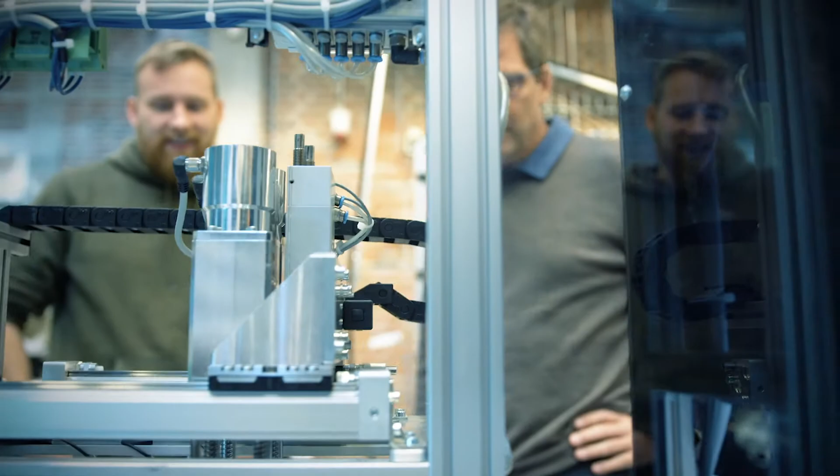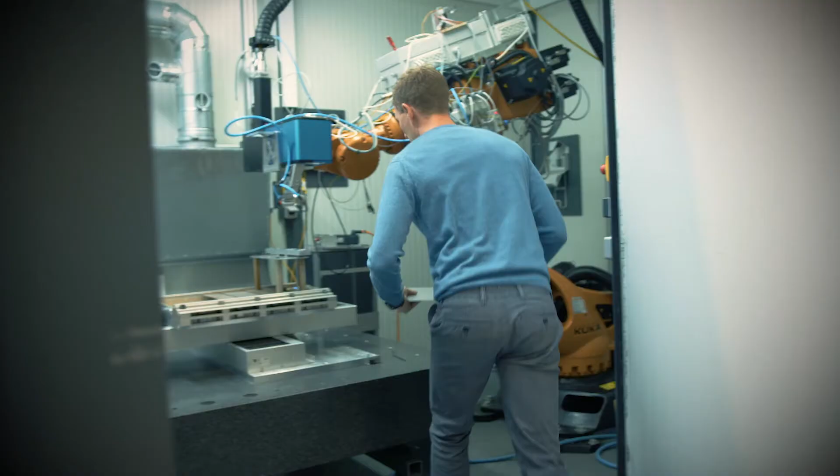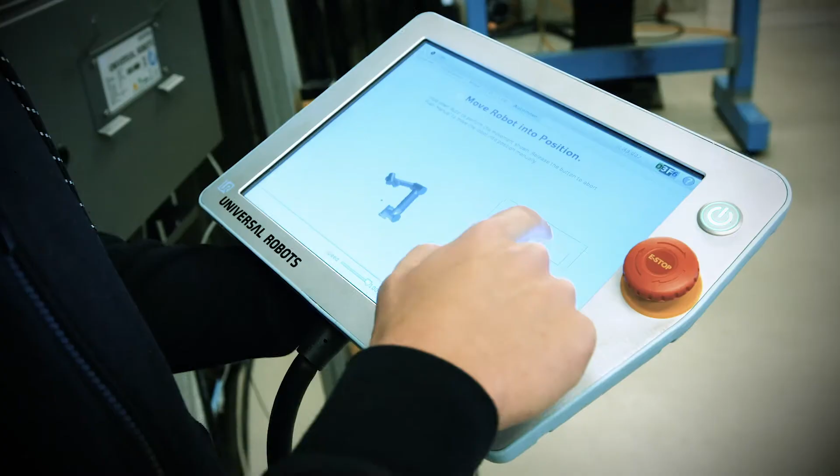The lab is a lab where we investigate robots. It's a multidisciplinary lab where we are focused on advanced robotics with a special emphasis on manufacturing robots. We created the lab because we saw there was a big need for robots in industry. The industry is challenged by small batch sizes, by constantly introducing new products and so on, so there was a need for new robotic systems for manufacturing. We also saw a need for multidisciplinary research, and we found that having a physical lab, a place where researchers from various departments could meet and do research, was very useful. We have 4 focus areas.

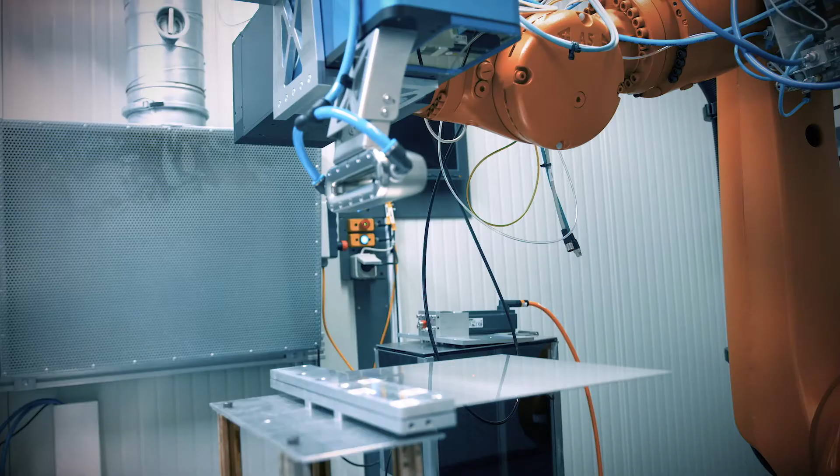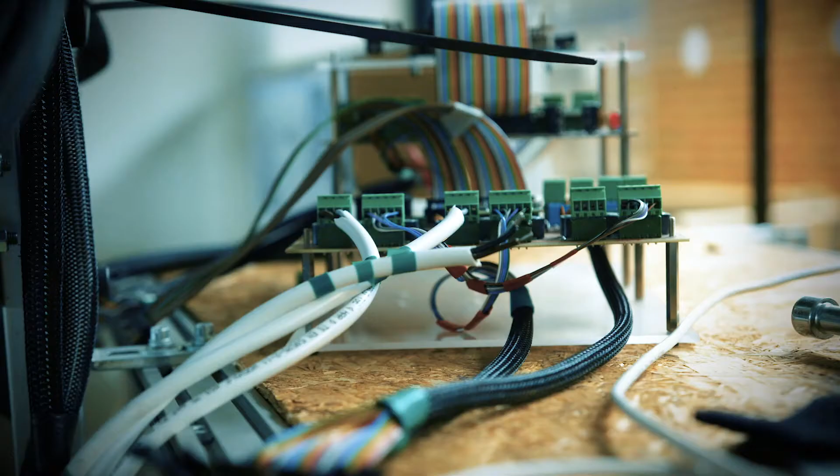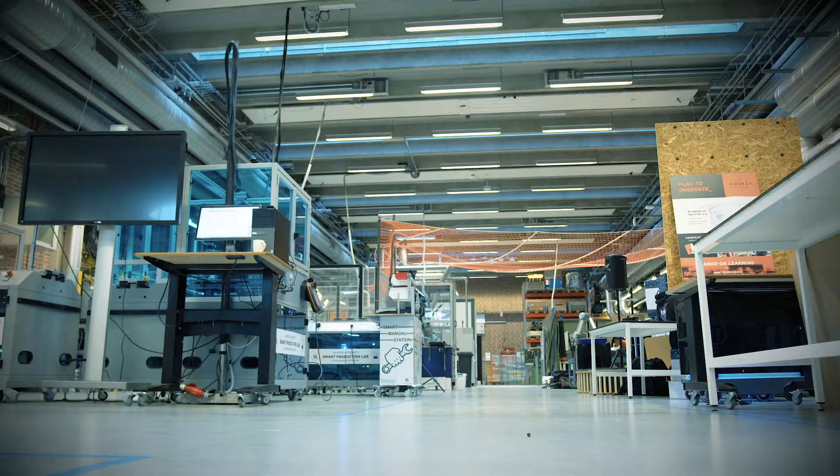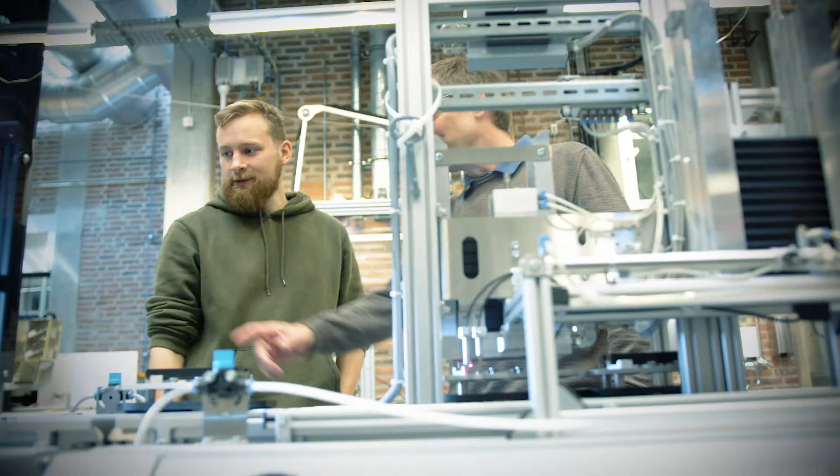Then we do research on AI, on self-learning and self-adaptive systems, a growing area where a lot of new technologies are coming out that we can really benefit from in the robotic world. One of the projects we have there is the Little Helper project, a mobile robot which can help you do a simple task in your manufacturing environment. Finally, we do research on robots in larger production systems, with a special focus on the role that robots will play in Industry 4.0, the future of manufacturing.

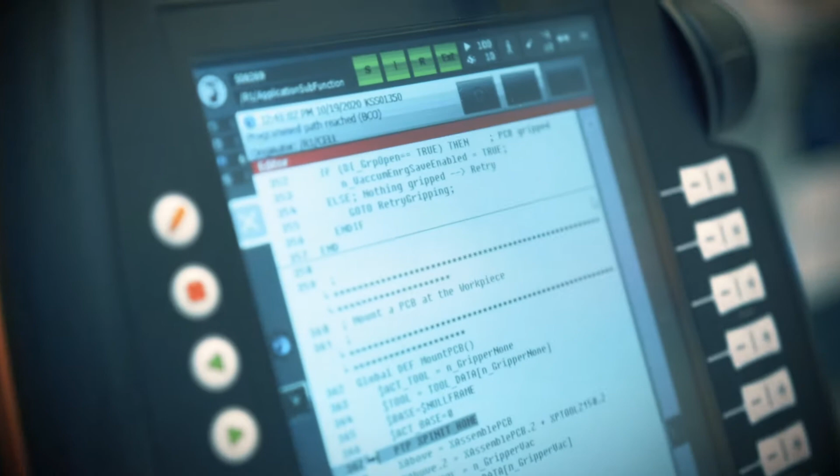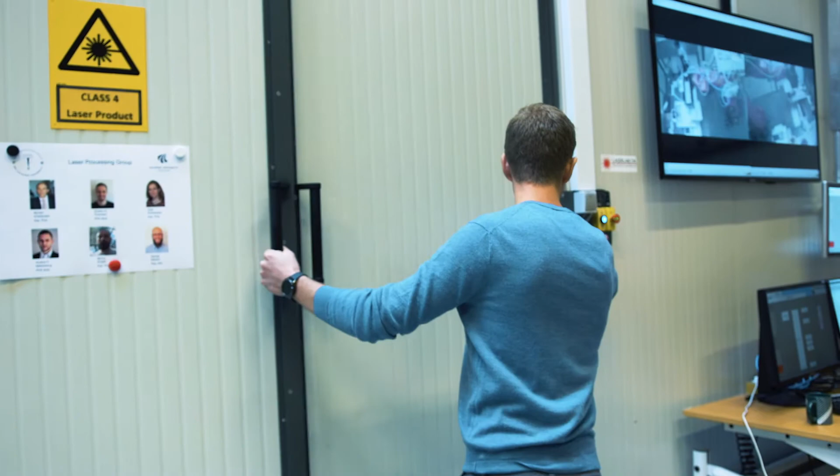Most of the research we're doing here is done in collaboration with companies. They come with applications and we use them as specification for our research. We also have partners who are system integrators, building robots and technologies. And finally, we have a number of universities around the world where we collaborate.

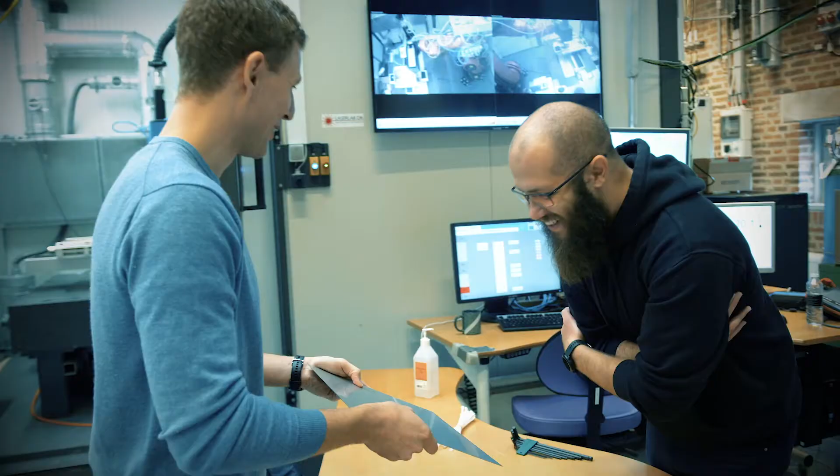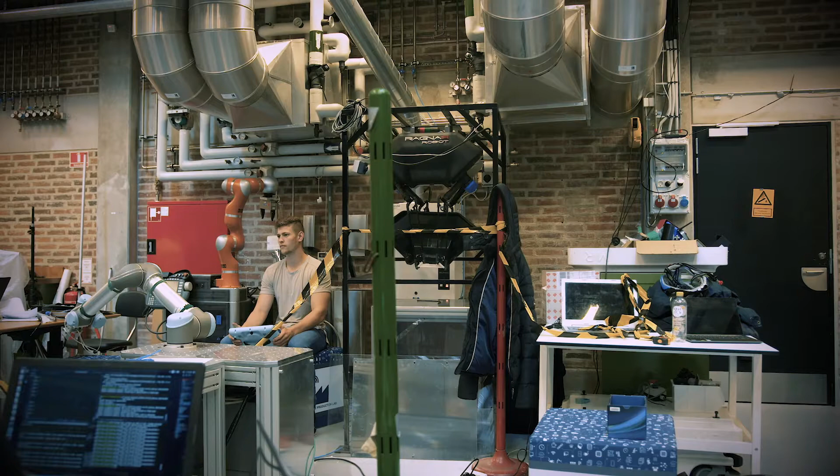In the next couple of years, we want to investigate the possibility to build a swarm factory. That is a factory where the manufacturing equipment, including robots, are very simple, small machines that individually can do very simple tasks. But when we combine them, intelligence will emerge, and we expect that we can design much more advanced and flexible systems than we have today.

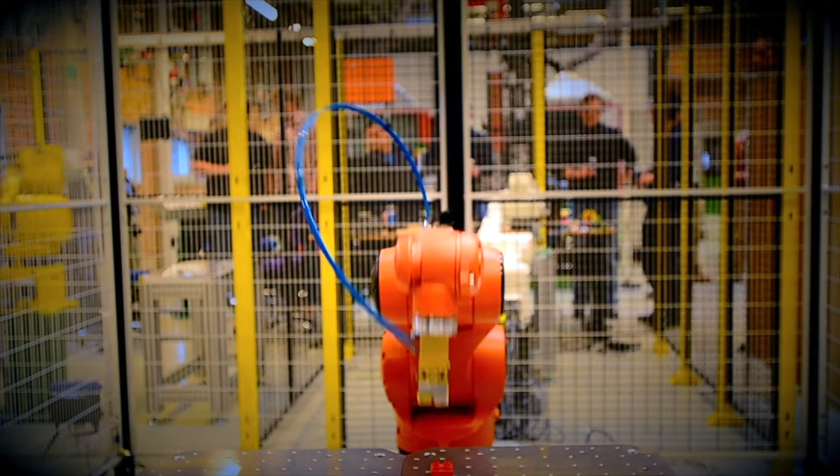Hello everyone, I'm Dimitris Chrysostomou, and in this segment I'm going to tell you more about our research in autonomous industrial mobile manipulators. As you may know, most industrial robots are fast, reliable and safe to use when they are behind protective fences. However, their mobility and flexibility is limited, as they have to be stationary, bolted to the ground and programmed for one task at a time.

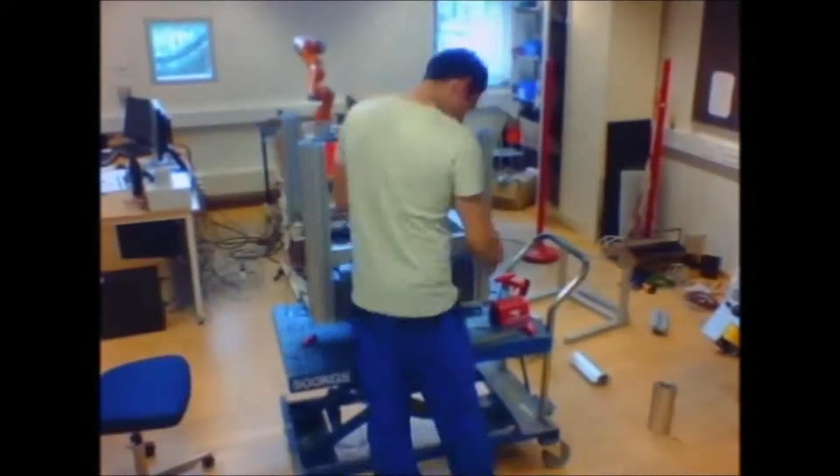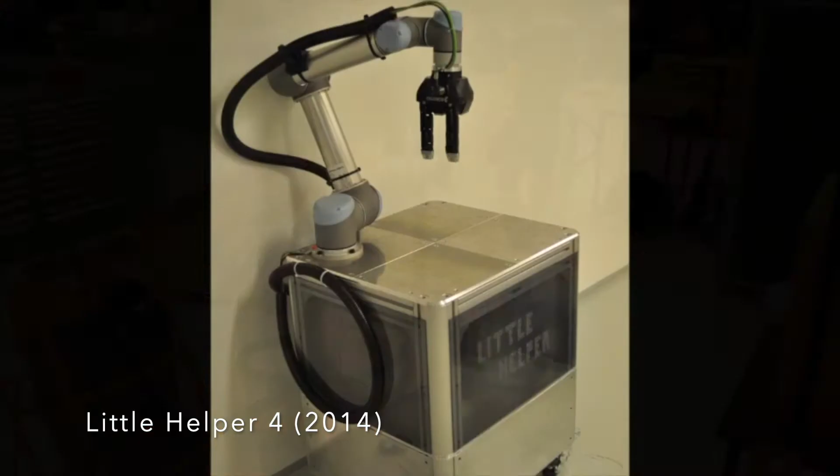Almost a decade ago, here in the Robotics and Automation group of AAU, we developed a robot assistant which can coexist with users for safe and easy interaction. We call it Little Helper, our flagship research platform which we use to bring flexible solutions, easy to program and integrate into a variety of industrial tasks and scenarios.

In collaboration with many industrial partners, we have developed different versions of our Little Helper research platform. It is a modular platform that consists of mobile or movable bases, while it can support 1 or 2 robotic manipulators. It adapts accordingly depending on the level of interaction we want to accomplish with our users.

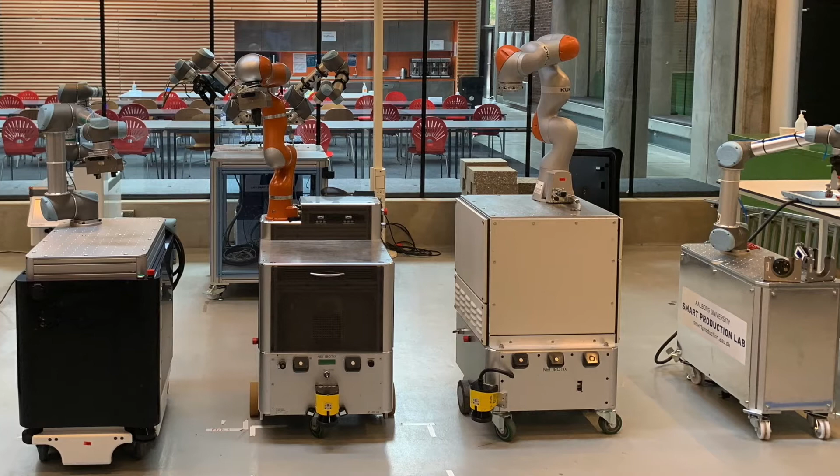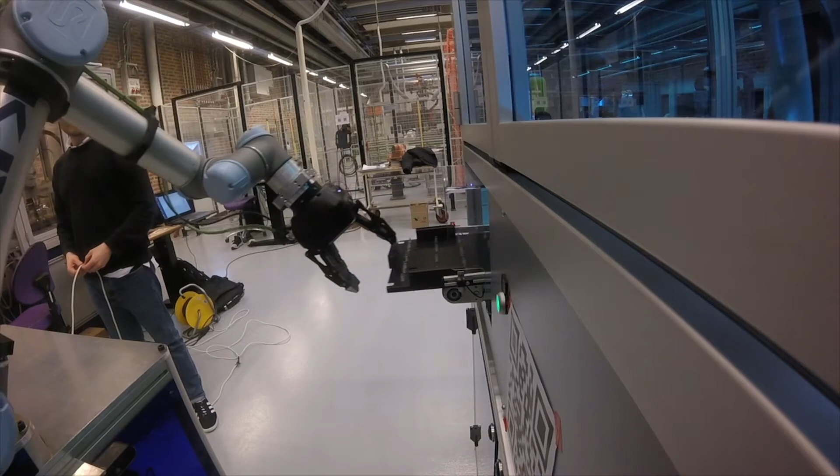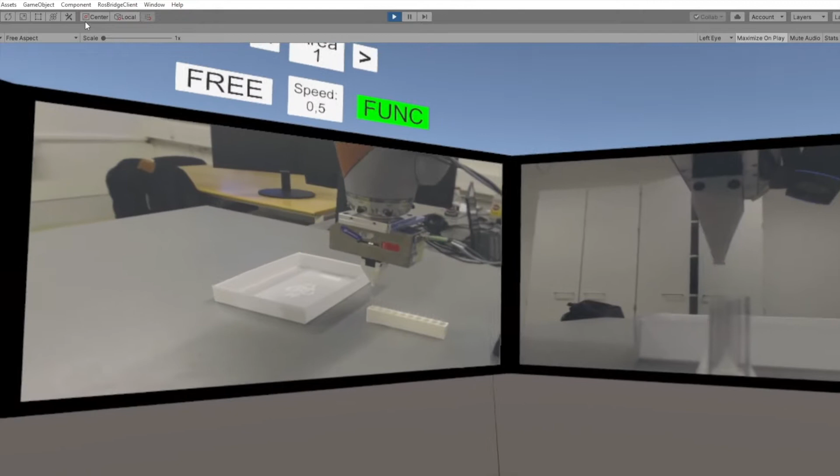Sometimes we have to tackle tasks where we need to work away from users, executing everyday procedures such as delivery scenarios inside our smart production facility, where mobility, precise calibration, localization and mapping are very important. We also want to facilitate users who work in sensitive environments, where human presence should be limited. In these cases, we employ virtual reality and augmented reality techniques, which can provide a unique perspective of the working environment to the users, while they operate Little Helper from another room.

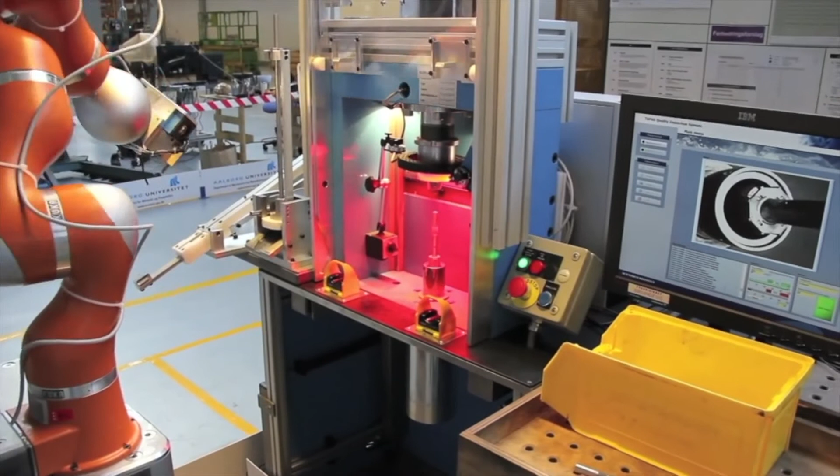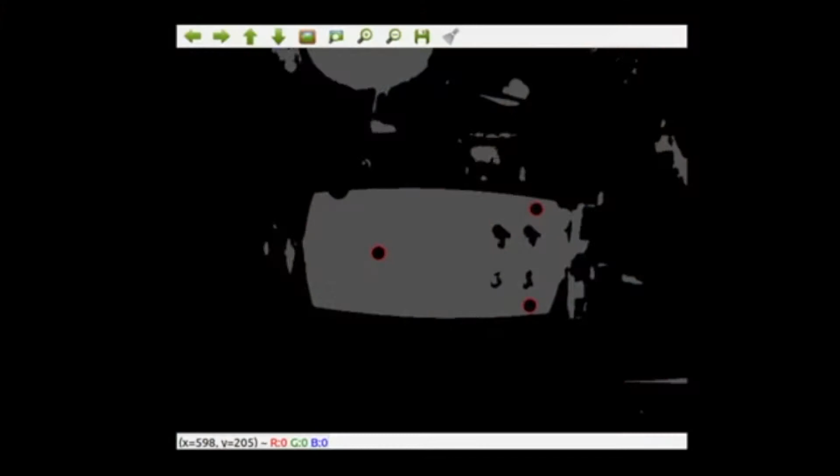Assembly of industrial parts is another area where we use Little Helper extensively. It is a very demanding task where advanced robot functionalities such as force feedback and station calibration are critical. In these cases, accurate object detection, recognition and grasping are very important as well.

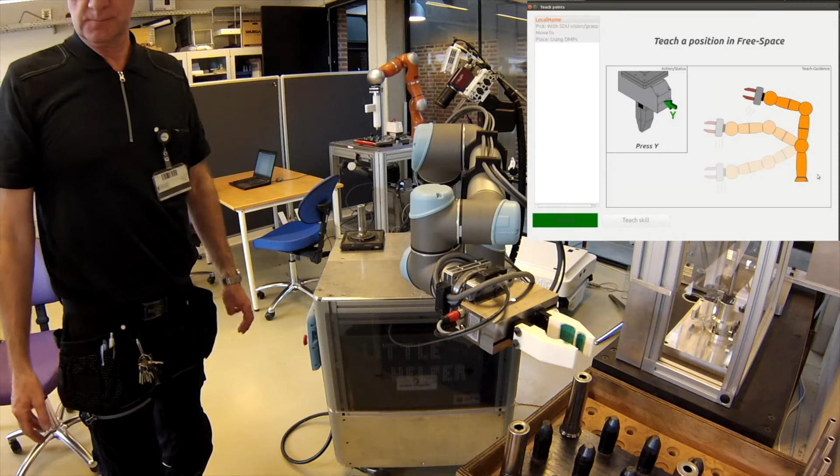On top of everything, Little Helper is developed to enable non-expert users to use a robot in everyday industrial tasks. For that reason, it runs a skill-based programming interface in the background which has been designed to facilitate easy and fast instruction of collaborative robots by inexperienced users, while it supports quick integration of existing off-the-shelf components in terms of hardware and software packages.

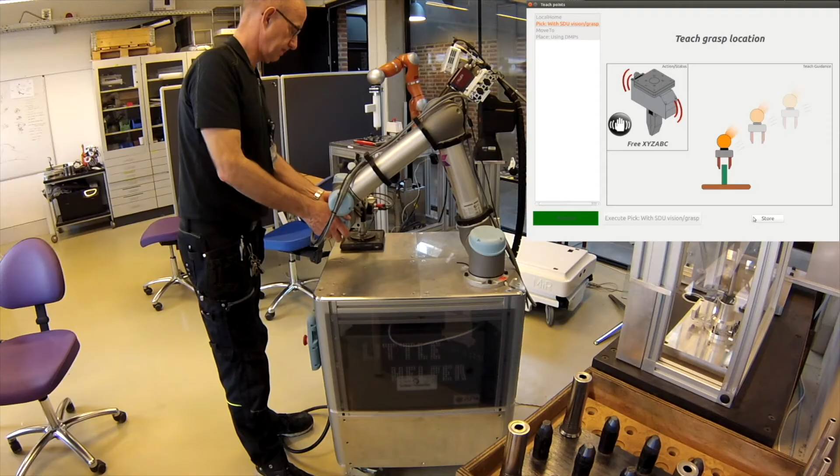Naturally, when we collaborate in close space with users, safety is a top priority in our research. Therefore, we have equipped Little Helper with user detection methods based on image processing and artificial laser walls. There, Little Helper can detect the user and adapt the speed of the robot arm, and it can communicate its current operating status with color-coded visual feedback.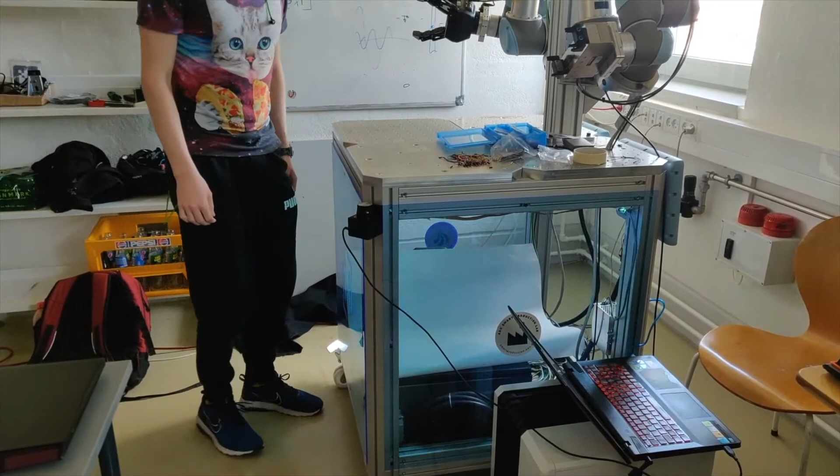Finally, Little Helper is also the platform we use as basis for our future robotics research. Towards our vision for a more sustainable society, many of our current projects focus on assistive human-robot collaboration tasks for automated disassembly processes of electronics and industrial components. This way, we promote circular economy initiatives and reduce the environmental footprint of manufacturing industry.

Stay with us, as Casper now will present our future research direction on swarm production, and later Simon will dive into our AI research in industrial robotics and manufacturing.

Thank you. I'm Casper Schou, and my primary research is within solutions for smart factories.

Let me present our research on swarm production, a new upcoming research area where we combine the domain of swarm robotics with industrial manufacturing to achieve high flexibility on the shop floor.

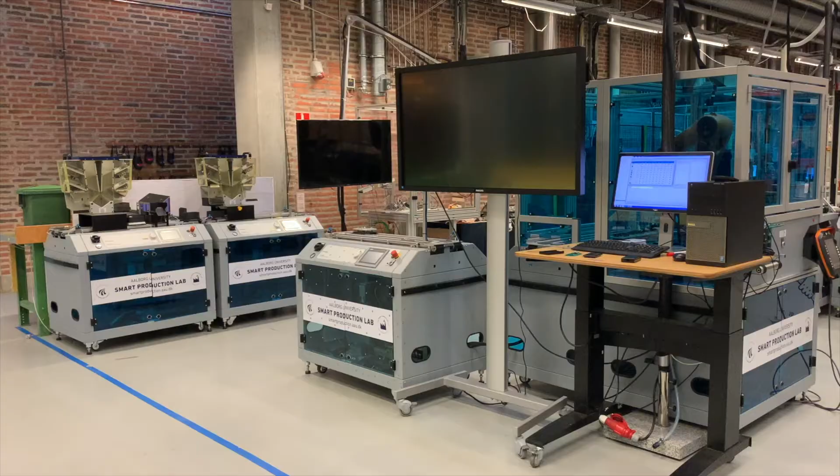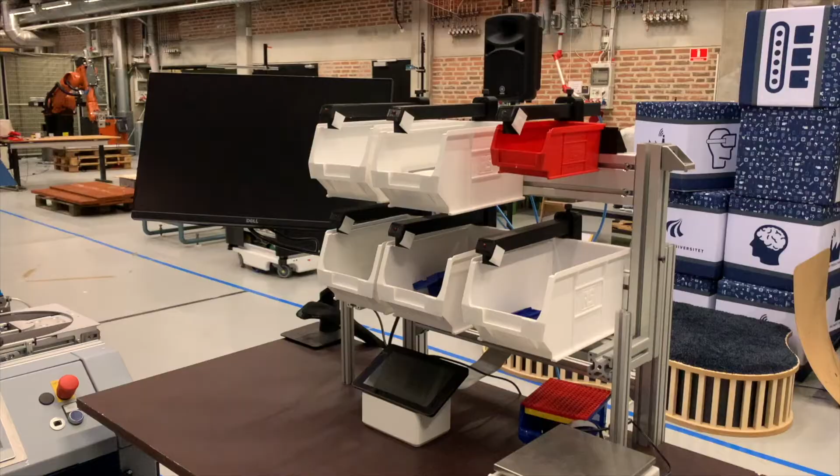Here in our AAU 5G Smart Production Lab, we have established a smart factory environment, including a Festo CP factory production line, our mini robots and little helpers, operator assistance tools, and a suite of digital solutions interconnecting these assets. In terms of flexibility, even this Industry 4.0 production is inherently constrained by the use of conveyors, as they route products along fixed paths, limiting us to a sequential flow.

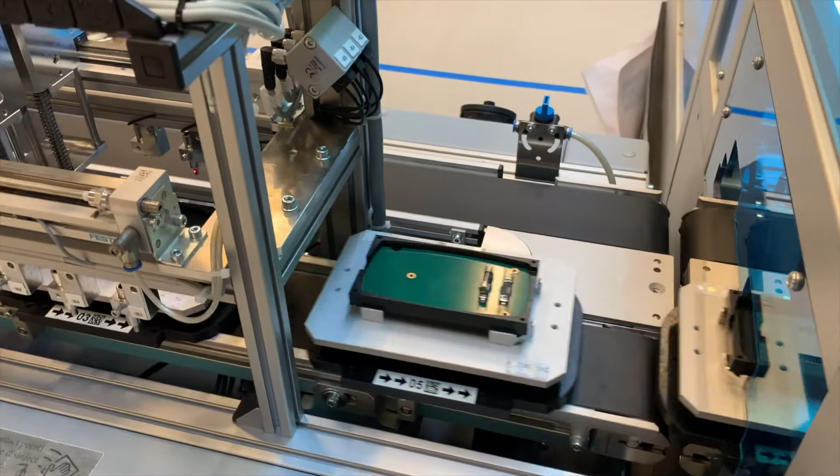With offset in this constraint, we are motivated by the vision of having products transported using cheap, small, mobile robots to create the production paradigm we call swarm production.

Using mobile robots not only gives us large routing flexibility, but also makes the system more robust against failures, allows easy scaling of capacity, introduction of new processes without system downtime, and allows individual order flows and priorities.

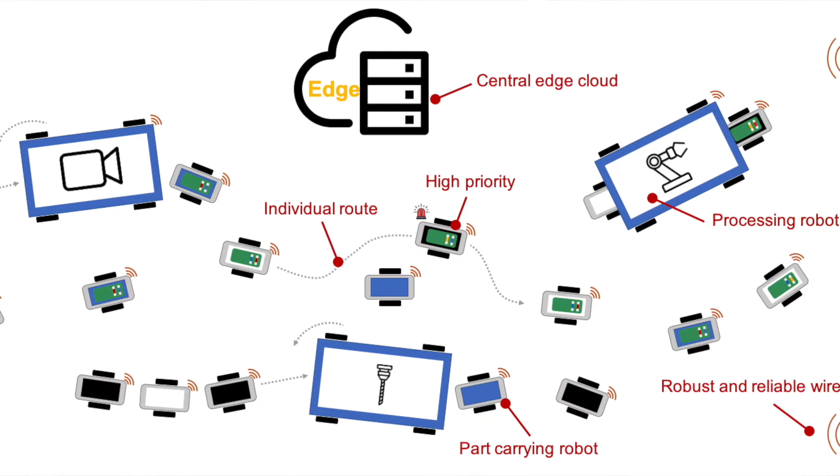We imagine the swarm will be composed of a variety of different robots with different capabilities, ranging from small part-carrying robots to little helper-sized processing robots.

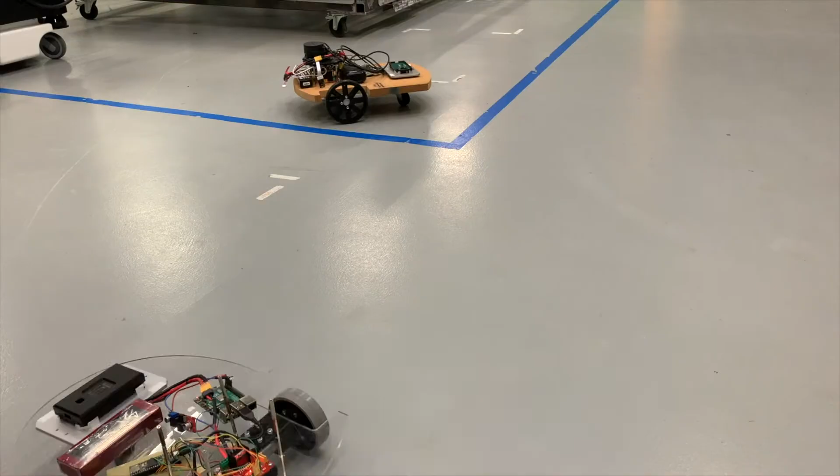Currently, we are carrying out early design sprints, experimenting with the layout and composition of both part-carrying robots and processing robots. To decrease the cost of the mobile robots, our architecture centralizes the navigation and online route planning of each robot on a central edge cloud.

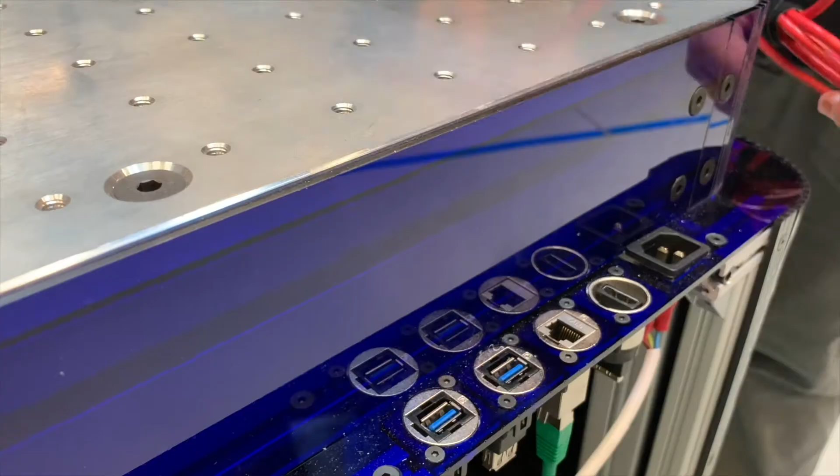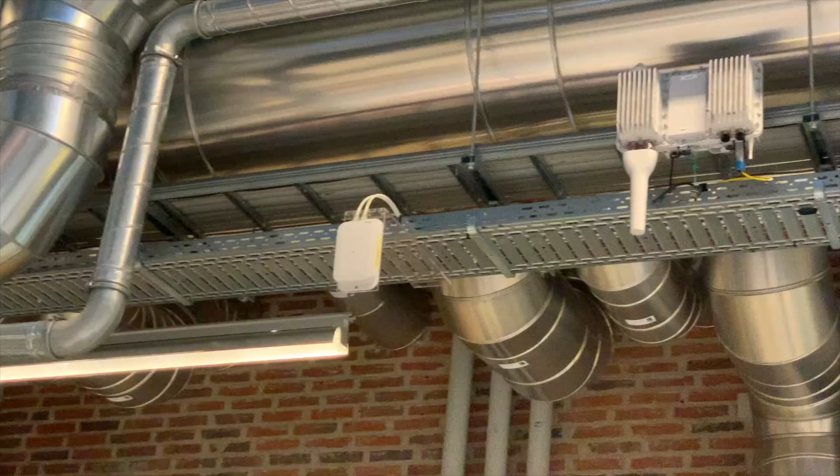Thus, fast, low latency and robust wireless communication is required between the robots and this edge cloud. For this, we have built up an infrastructure with both private and public 5G networks, Wi-Fi 6, and both an ultra-wideband and an ultrasonic positioning system. An infrastructure that allows reliable and low latency communication, even when using a swarm of devices.

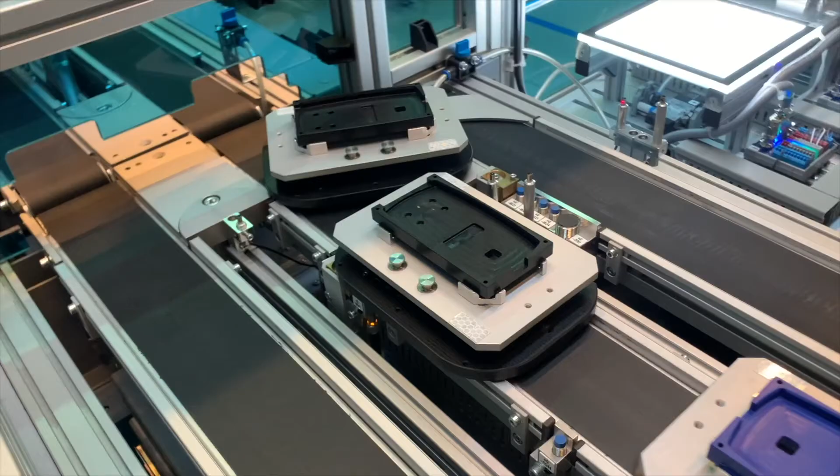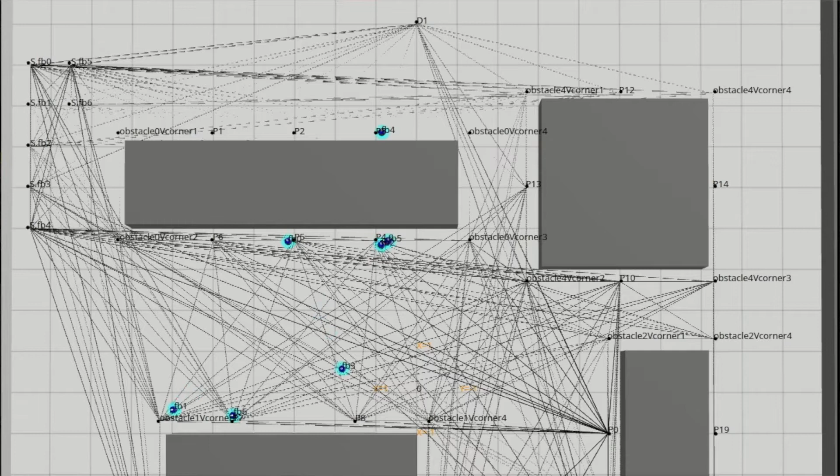Finally, retaining production efficiency while exploiting this flexibility offered by swarm robotics calls for very frequent task plan updates. Together with our colleagues from computer science, we are working on distributed, near-optimal task planning and scheduling strategies using the AI technique called Q-learning. Some of these strategies we are currently testing out in large simulation environments, including hundreds of robots and a highly dynamic order flow.

And now over to my colleague Simon, who's going to present much more in depth about our AI research.

Hi, my name is Simon Bøe. In our next part of research, AI for industrial robotics and manufacturing, we are tackling the AI gap between research and industry, where we focus on adaptive and self-learning robots and automation systems.

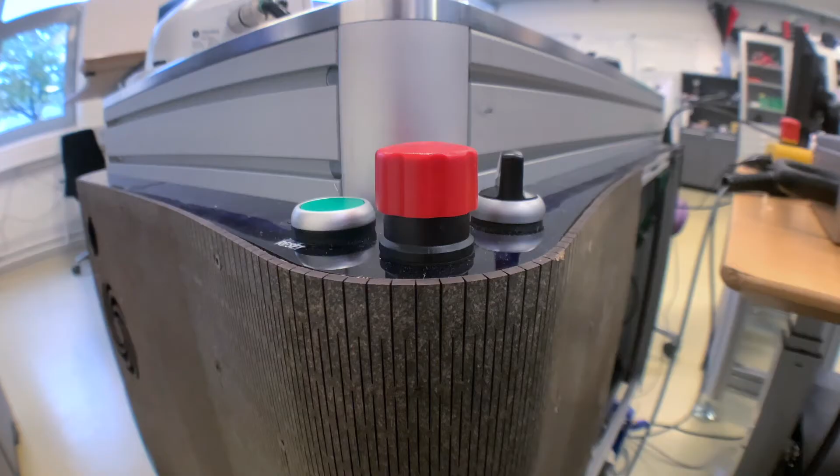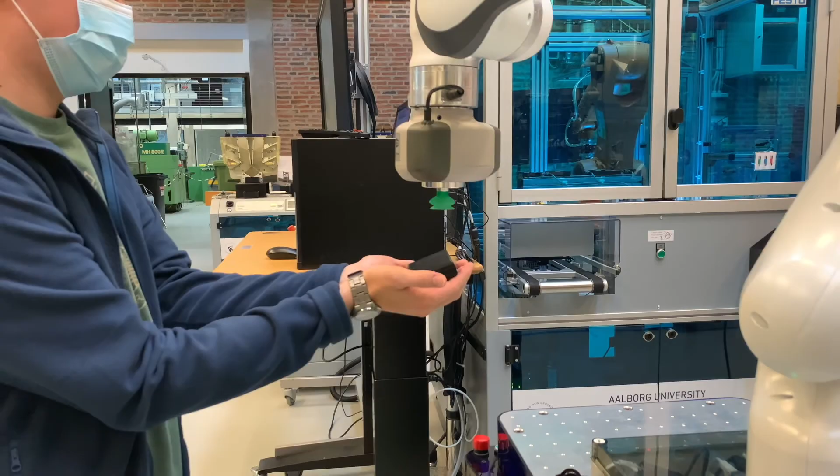AI is redefining the landscape of intelligent robotics and automation in manufacturing industries. We help manufacturing companies navigate and demystify the hype around AI and put it into practice. We do this through student projects, research projects, and strategic collaborations with companies. Let's have a look at some of our projects.

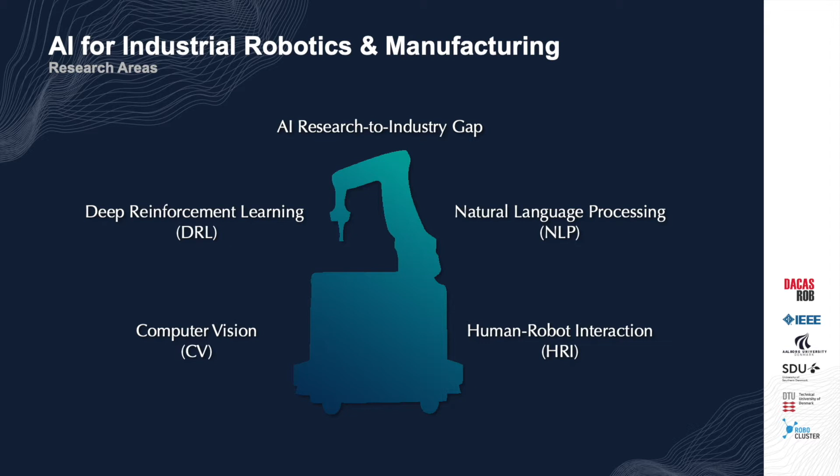Deep reinforcement learning is one of the pinnacles of AI today. In one of our projects, we work with robot grasping. How can we enable a robot to, on its own, learn how to grasp objects without knowing anything beforehand?

The robot acts as an autonomous agent where it learns how to act optimally and carry out the task without any supervision from a human. Through the interaction with the object and the environment, it receives rewards, and over time it learns how to act in an optimal way. We also use this technique for mobile robot behavior and navigation.

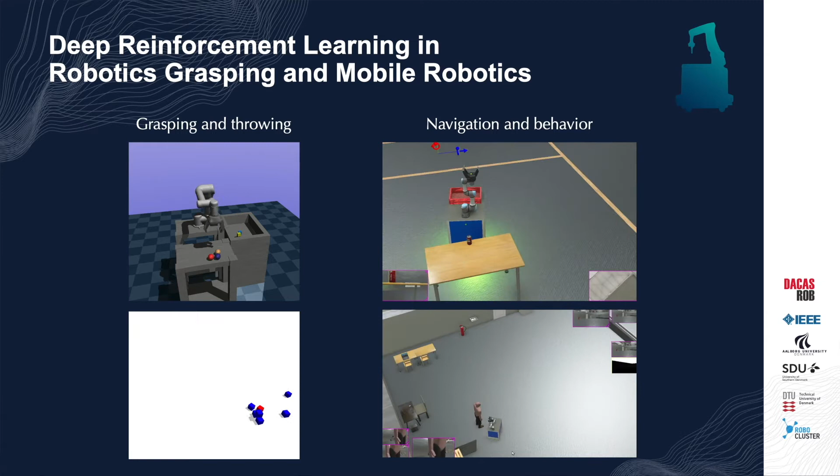So how can mobile robots learn how to navigate a human environment in an optimal and safe way? Human-robot interaction is always critical in many robot applications. The natural interaction between the human and the robot we enable through natural language processing and acoustic analysis.

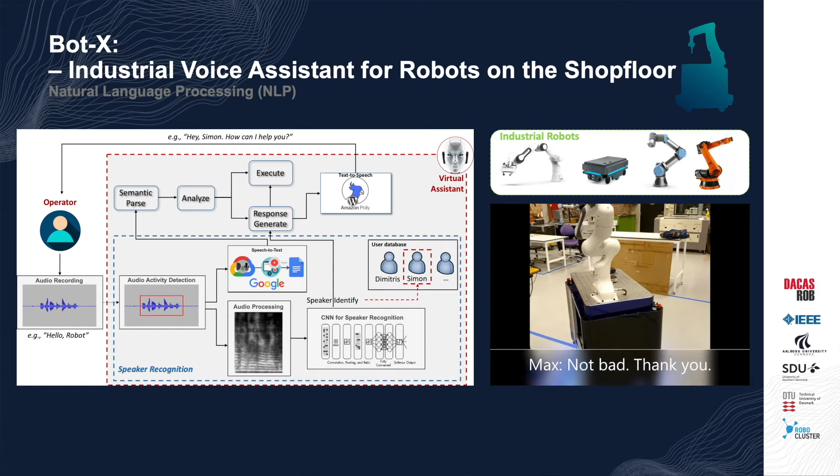We design and develop voice assistants so the human worker can naturally interact and talk to the robot. Through various commands, the robot learns how to carry out tasks that are given by the human worker. Acoustic analysis can also be used for other industrial processes, for instance robot welding. By recording the acoustic signals and time series data from the welding process, we can analyze and assess the quality.

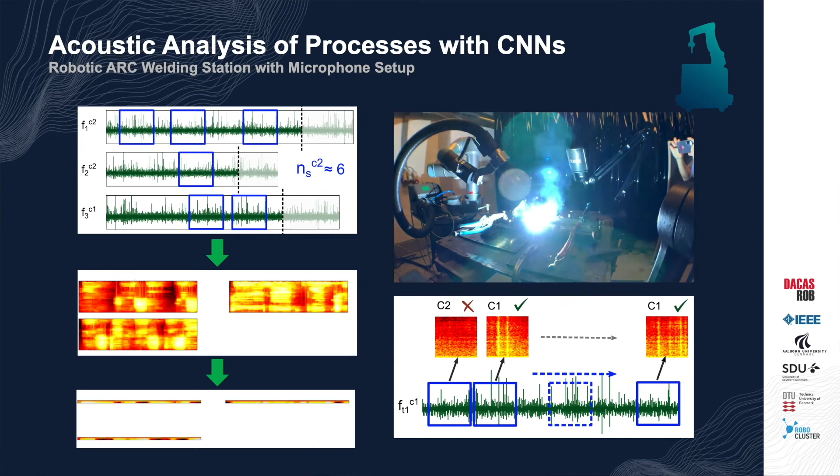We also rely on computer vision in many of our robot applications. A robot system or industrial task without eyes makes it very difficult to solve the task. In one of our projects, we detect defects on offshore platforms.

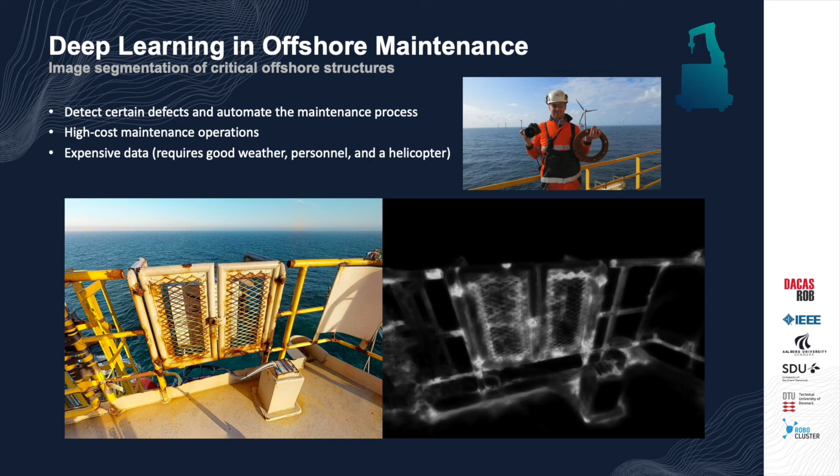This is usually a very tedious and dangerous task, which requires a lot of manpower, and in the end it becomes very costly because we have to send humans to the offshore platforms. By designing an automated system, we can detect certain defects and automate the maintenance process needed for these kinds of industries.

Finally, we want to enable artificial intelligence for small and medium-sized enterprises. These days we see that AI is primarily for the universities and larger companies who have the budgets and skills to actually carry out a deep learning project.

Through one of our projects, we investigate how we can enable advanced technologies for smaller companies so they can also harvest the benefits of artificial intelligence. In this case, we need to wrap the methodologies and models in an easy and intuitive platform which can enable the shop floor worker to actually train the network without knowing anything about deep learning.

In this case, we want to be able to feed many different kinds of data inputs, which can be time series data, acoustic data, images, videos, and so on. So AI is a natural enabler for improving the manufacturing industry of the future. Our vision is to continue close collaboration with industry and enable these technologies and make them accessible for both big and small companies.